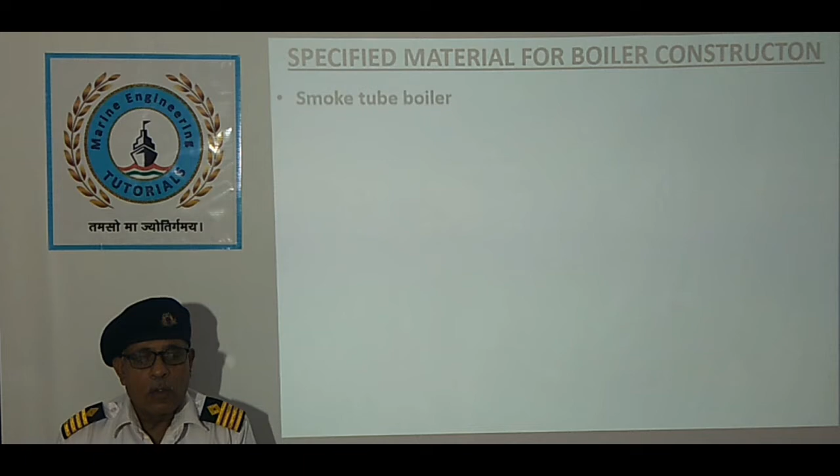Let us discuss the specified material for construction of the boiler. The following materials have been specified for construction of the boiler. For smoke tube boilers, plain low carbon open hearth steel with ultimate tensile strength of 430 to 540 meganewton per meter square is used.

For water tube boilers, low carbon steel with carbon 0.28%, manganese 0.5% and silicon 0.1%, having ultimate tensile strength of 430 to 490 meganewton per meter square with minimum elongation of 20%, is used.

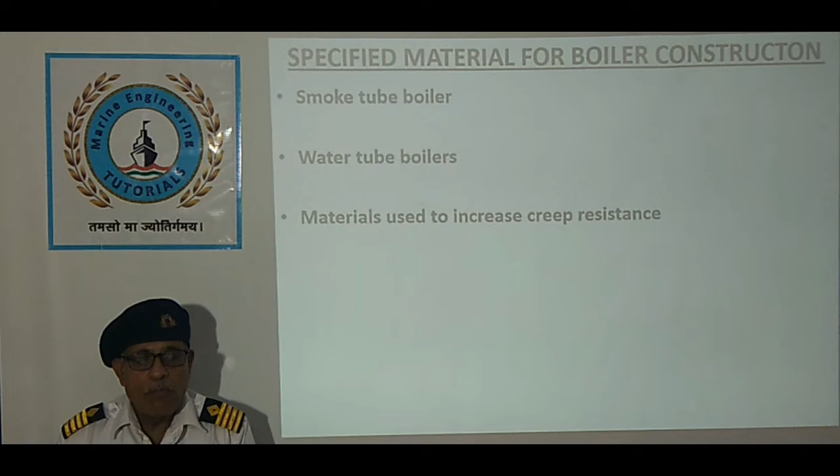Materials used to increase the creep resistance are chromium, molybdenum, manganese and vanadium. Plain low carbon steel with 0.15% carbon is used for superheater tubes with steam temperature up to 400 degrees centigrade. Low carbon steel with 0.5% molybdenum is used for steam temperature up to 480 degrees centigrade.

Austenitic stainless steel with 18% chromium, 8% nickel and niobium is used with steam temperature up to 590 degrees centigrade. The valve chest is made of cast steel. The material used for valves, valve seats, spindles, compression screws and bushes must be non-corrodible, such as bronze, stainless steel or Monel metal.

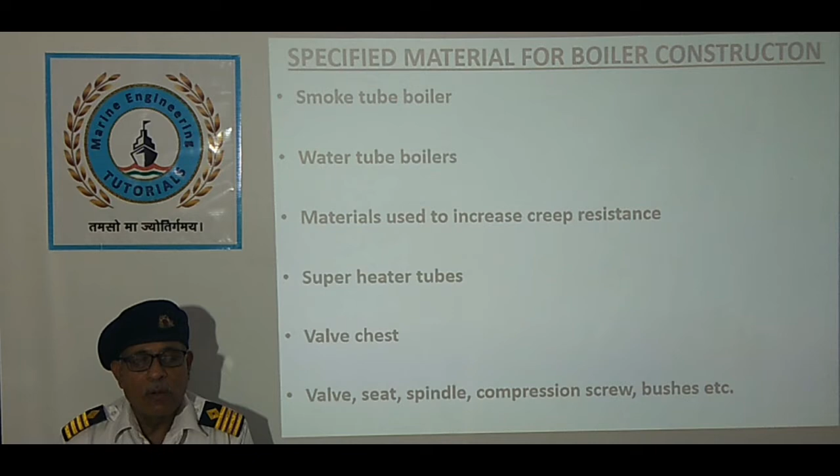Let us see the basic data required for class approval. The boiler manufacturers have to provide the following details in order to get themselves registered with the classification society for getting the type approval of the boiler. First is the design data. Design data consists of heating surface, evaporative capacity, design and working pressure and superheated steam temperature.

Safety valve settings and capacity. This specifies the type, size and number of safety valves with their flow coefficient and their set pressure in accordance with the classification society rules.

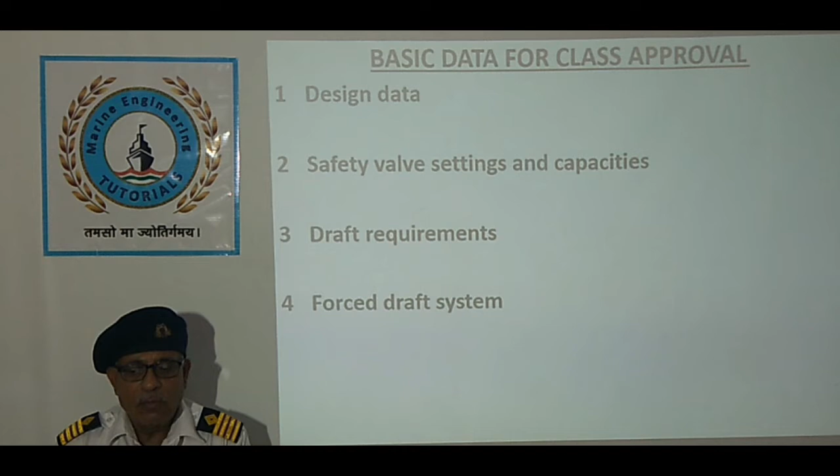Draft requirement at design condition: the number and capacity of the forced draft fans to supply the combustion air. The forced draft system describes how the combustion air is supplied from the forced draft fan up to the boiler furnace through the air heater and register.

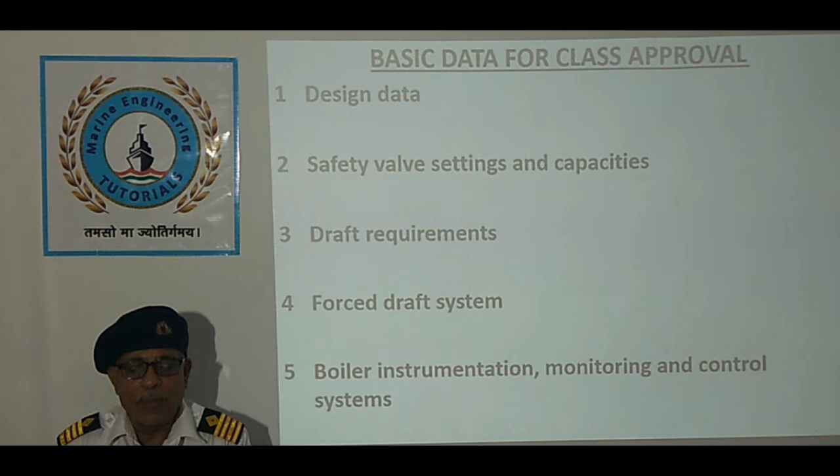Boiler instrumentation includes pressure gauges, thermometers and safety devices such as high steam pressure, low water level and flame failure trips. For safe and reliable operation of the boiler, it also includes controls for water level, steam pressure, superheated steam temperature and monitoring the quality of combustion in the boiler furnace.

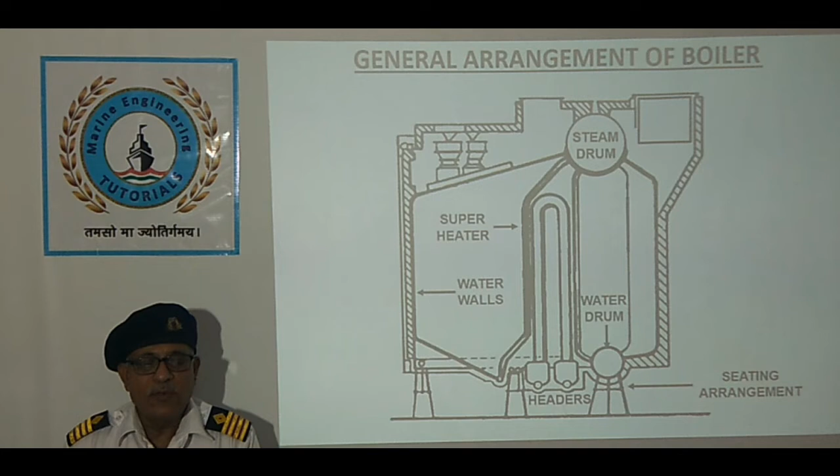Then we have the superheater, steam and superheater tubing, including the maximum expected mean wall temperature of the tube wall and the tube support arrangement including drainage from the header, which is also given to the society for approval.

Then we have the economizer arrangement, its header and elements detailed, which are used for feed water heating. Then we have the boiler casing, which shows how the flue gas leakage is prevented, and the refractory or insulation arrangement for containment of the heat within the furnace.

Then we have burners on the furnace roof. So this will include the arrangement of the burner including the registers. All these data need to be provided for approval of the boiler.

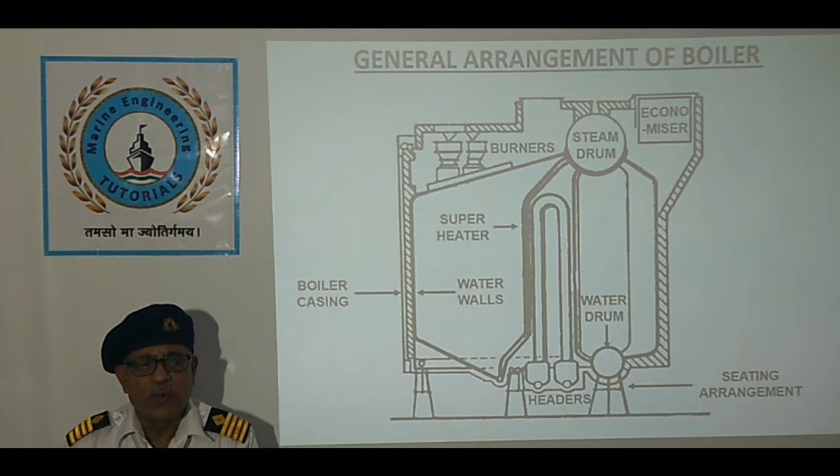We have the safety valves. Now, in addition to safety valve, we have several other mountings such as stop valve, air vent, pressure gauge connection, feed and check valves, blowdown valve and safety valve with their relieving capacities. Then we have the water level gauges. Blow-off arrangement, water level gauges, types and their fitting details need to be provided to the classification.

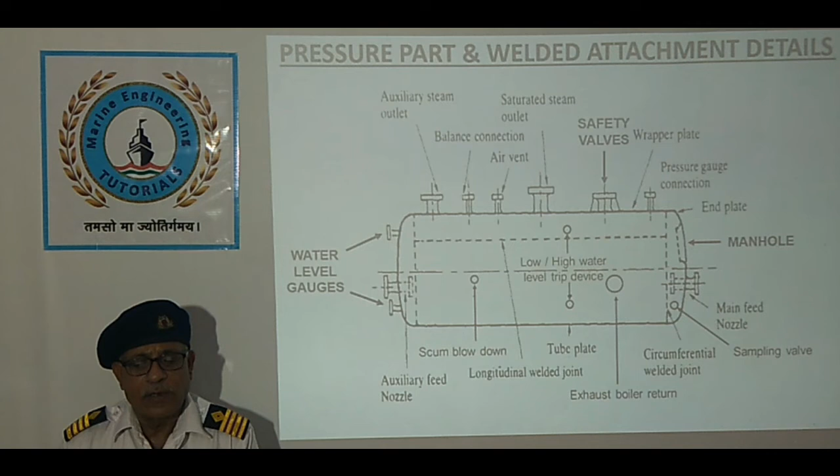Then we have the manhole or handhole, that is inspection opening. Inspection openings such as manhole and handholes with their fitting details also are provided. The sketch shows various weld designs used in the construction of boiler for joining two plates or tube and plate. These details are provided to the classification for the approval.

Now, in addition to the typical weld designs, it is also needed to provide the permissible welding consumables which are used, and specialized welding techniques used for construction such as electroslag welding, submerged arc welding or any other specialized procedure.

Then what heat treatment is provided after the weld, such as annealing, which is carried out to relieve the internal stresses, refine grain size and induce ductility. Destructive and non-destructive examination conducted on the boiler drum to assess the strength of the boiler and to see the structure of the metal is also informed to the classification.

Then when the boiler construction has been completed, it is tested with water inside at a pressure of 1.5 times the design pressure to assess the endurance of the boiler, and this must be done in presence of the surveyor. Boiler is inspected by Classification Society surveyor at various stages right from construction until the ship is trading. This completes the study of requirements by the Classification Society for approval of a boiler.